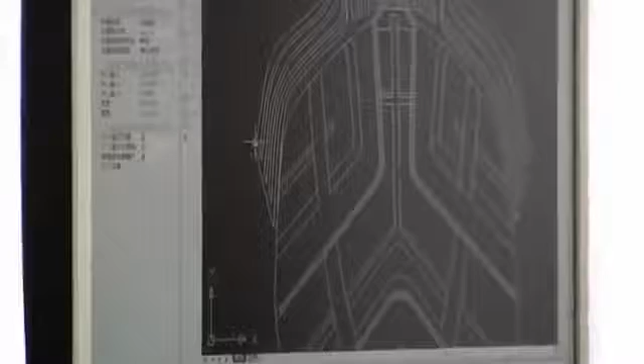We had a common problem, I think, that most organizations face, where the data that we were producing was being made in several sets of CAD modeling tools. It became a strategy of Black Diamond to try to stabilize onto an up-to-date, modern, and quite powerful design modeling tool. We were modeling a shovel blade, and the shovel blade didn't have any straight lines or parallel surfaces or anything simple. It was all very organic in shape.

One package that we had been using previously was having a very hard time getting those surfaces to thicken. And when we brought those surfaces into NX, it thickened within just a few seconds and without any errors. So that was a very clear example of how NX was superior to what we were using previously.

As we started to implement NX at Black Diamond, the goal was not only to put a more powerful tool in our designers' hands to create things like boot models and ski models, but also stabilize and unify the tools we were using to produce CAD data. NX not only allows us to design what we want, but it helps us do it a little bit more quickly and a little bit more efficiently. It doesn't hold us back and gives us the flexibility in design to do what it is that we really want to do.

A boundary-free skier wears a free-ride boot to hike a mountain, far from conventional resorts, and then skis down private, pristine slopes. A free-ride boot's comfort, flexibility, and functionality for the climb up are as critical as fit, performance, and stability for the ride down. Black Diamond was determined to exceed the quality and performance of European competitors in this sector, and found that NX was the ideal tool for their new free-ride ski boot project.

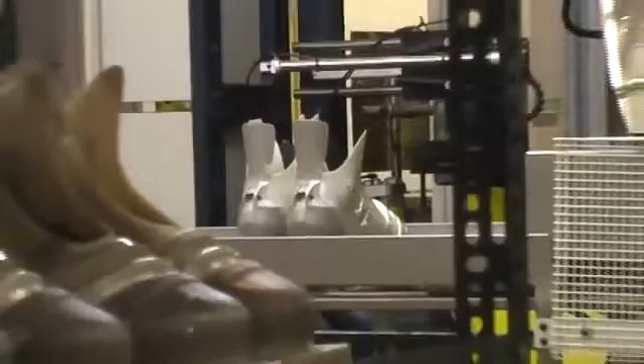Black Diamond's been involved in boots for a long time, but we didn't ever handle the design and engineering and sourcing start to finish. It was a big project. This is called an Alpine Touring boot, where it has a rubber bottom to it. It has a bit of a rocker here, so it's more of a natural striding boot. You're actually using your skis with a skin on the bottom to go uphill. The boot needs to be lightweight and flexible for that.

And an alpine boot, like an alpine racer, you want a big, heavy, stiff, burly boot for that kind of activity, and we wanted to bring those two boots together and be kind of in the middle with an alpine-like skiing performing boot, but a touring freedom boot. One of the biggest challenges with doing a ski boot is the combination of the fit and the performance of the boot. There's no real separation between the two. The requirements are pretty difficult.

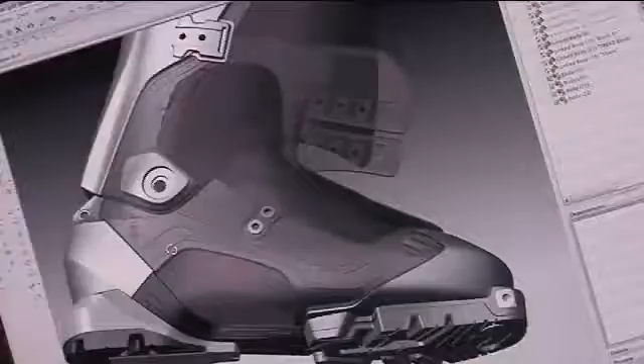One of the biggest advantages of NX has been that you can create those surfaces that are really difficult to create, that you can control the fit and the shape, but then you can also use those same surfaces for the engineering tools or the solid modeling. You can't just add a gusset or put on a steel strap or something like that. So the form really is the function in the case of these ski boots. You're always going to be adjusting for fit.

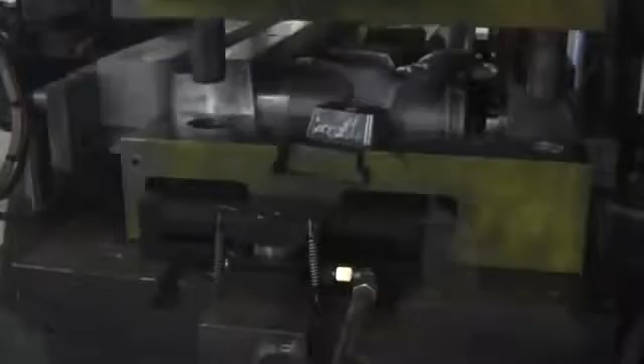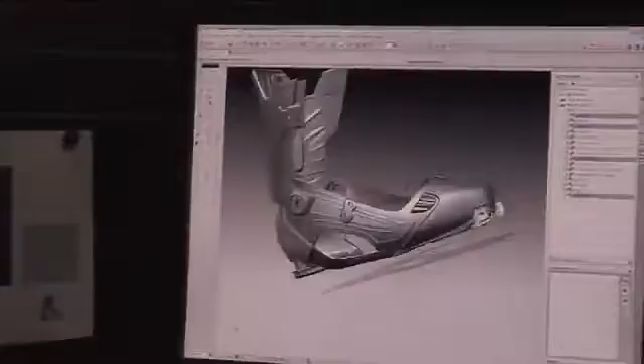But on a big plastic shell like this, a change to the tooling can take months, or at a minimum it's weeks. And so if we're also adding weeks and weeks to the modeling end of that, it would be impossible to iterate. If we need to make a change, we need to be able to make it really, really quickly. The more familiar I got with the surfacing tools, the more I realized that it's a pretty powerful surfacing package. It's pretty unique to have all those surfacing tools and then be able to transition into a solid model.

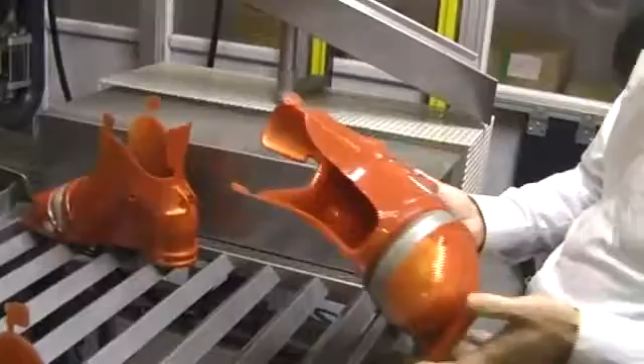NX is what allows us to basically go from Class A surfaces, which we receive from our industrial design crew, and get all the way into first prototypes and into manufacturing. And being able to make relatively quick adjustments to the shape, but on a large, solid part is really the big advantage. And it's not only faster, but there's a lot of packages where it's not even possible.

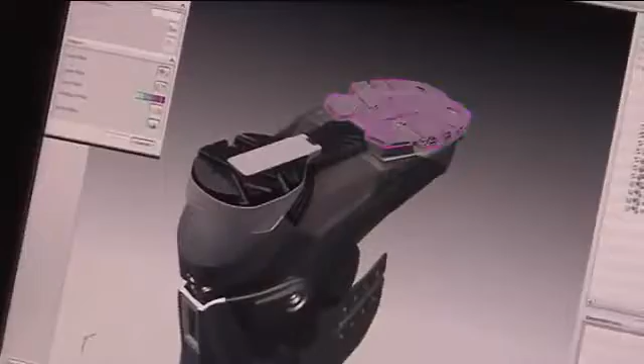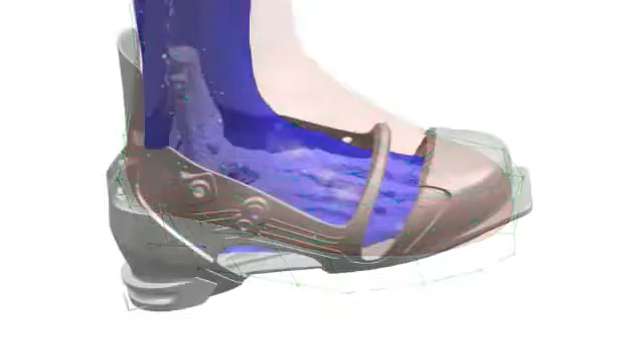We built the models in a way that we had constraints around the features that didn't change from one size to the next, and things like the last shape and the A surfaces on the outside. It's not just a linear scale. As your foot gets bigger and smaller, the relative change of different proportions on your foot are different. And so to take all those into account for the parts of the boot that had to adapt with the foot and the parts that had to stay constant with respect to the binding or components that were shared from one size to the next. And have those all as associative features in the history of the model.

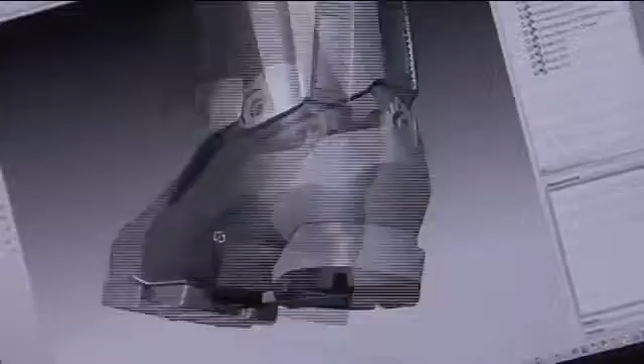Where that helped me a lot is that if I set up a model correctly and use the right surfacing tools, that down the road, if a development engineer came to me and said we need to pull this whole region out by 4 millimeters, instead of having to go back in and resurface an entire boot, which takes a long time, I could go in usually pretty quickly and make the adjustments I need to and maintain the proper tangency and the proper aesthetic that we were going for on the boot.

We did have a problem in one case with the teeth on here were slipping, and we identified that early on, and it was just really easy to make a change here, send the files over, get new parts, and the following week be testing new data.

The Freeride boot project was completed almost entirely using Siemens software. And the power and flexibility of NX allowed Black Diamond designers to be innovative with the boot design, innovative in their process, and quick to make iterations. The result? A Black Diamond Freeride boot that surpasses the competition. The team is already looking forward to their next product innovation.

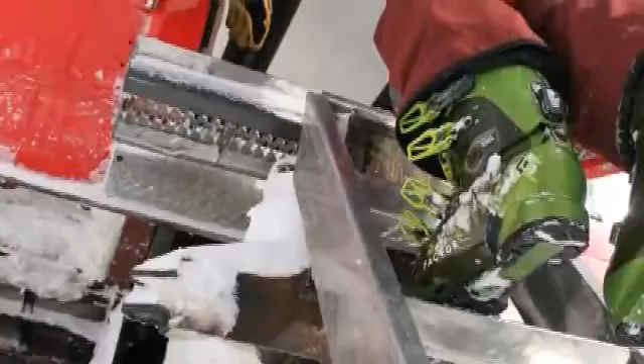We're working on the new generation of boots, and so this time around we're doing even more analysis. We're doing even more to optimize the weight and the structure of the boot so that we can make the boots lighter, stronger, higher performance without sacrificing what we've already learned. The more data we have and the more information we have, the better we'll be able to use things like finite element analysis to drive our new designs.

There are a lot of companies in our industry that are good competitors, but as we continue to grow and implement tools like NX, I think that will give us a competitive advantage over some of those other companies because we'll be working in a way that's much more efficient. We won't be held back by our CAD tools. We'll actually be empowered by them to design products that truly will be able to lead in our market.